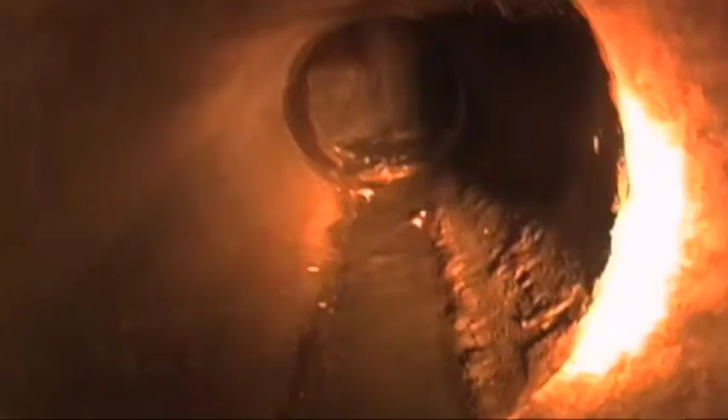So wastewater originates from predominantly industrial, commercial and domestic sources, and in the majority of cases this effluent's released back in the environment after receiving lengthy processing and management to minimise its impact on the health and safety of the environment and the public. However, with the development of new technologies, newer emerging pollutants are being detected and researched.

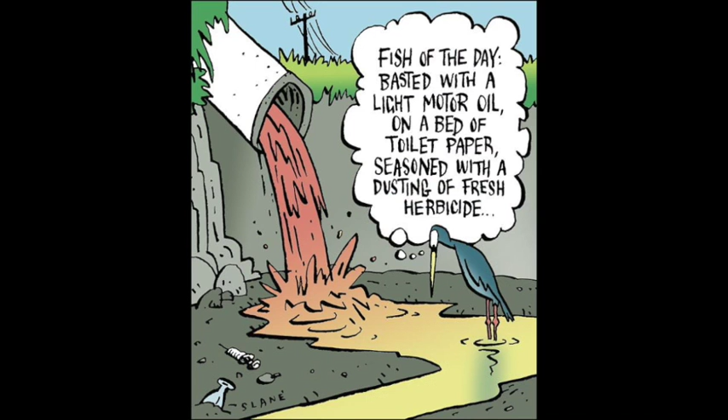These can be originating from a new source, using a different or newly exposed pathway to the environment, a waste or byproduct from a new treatment process, or a new detection method has highlighted their existence. Currently, the baseline data, including occurrence and concentrations of management policies and processes to deal with most of these emerging pollutants, do not exist, and their ultimate fate is largely unknown.

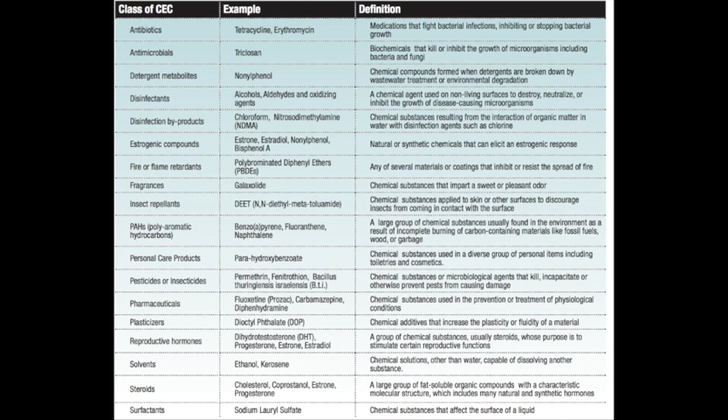A study conducted of marine water from 30 sites adjacent to stormwater outlets across the entire Sydney estuary, the first of such in Australia, had alarming results. The presence of recognised domestic waste markers and pharmaceuticals in all parts of the estuary, especially after a long dry period, indicated that sewage is leaking into stormwater systems or domestic wastewater is being illegally connected into stormwater piping.

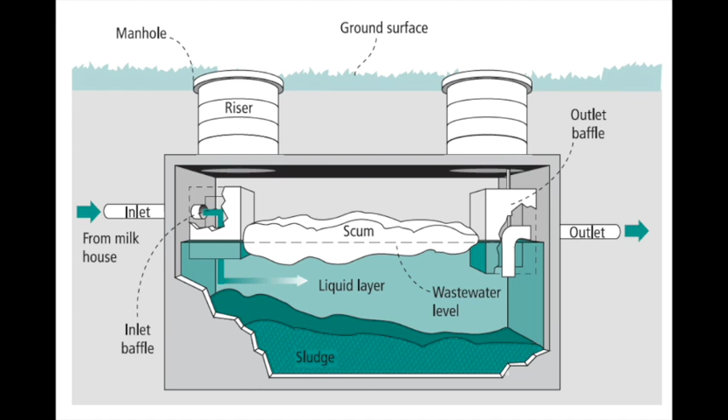Regardless of the stringent treatment protocols for the processing and fate of our wastewater, all pollutants will never be completely removed from reaching our environment if this is the case. Aerobic and anaerobic water treatment. Aerobic is done especially when COD is below 2000 milligram per liter and when the production of effluent quality is 120 milligram per liter and 20 milligram per liter of BOD.

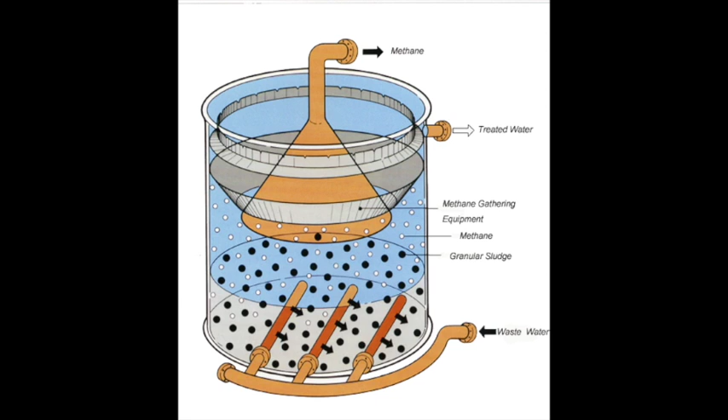It is technologically very good as it improves oxygen supply in the water, decrease of sludge, work within the integrity of control system. The anaerobic is the opposite, when the COD is above 2000 milligram per liter and BOD is above 1000 milligram per liter. This option is more sustainable and in the long run more economical. There are good options for this anaerobic system. It produces biogas, low sludge production, no odor release, small footprint, and more energy production instead of energy consumption.

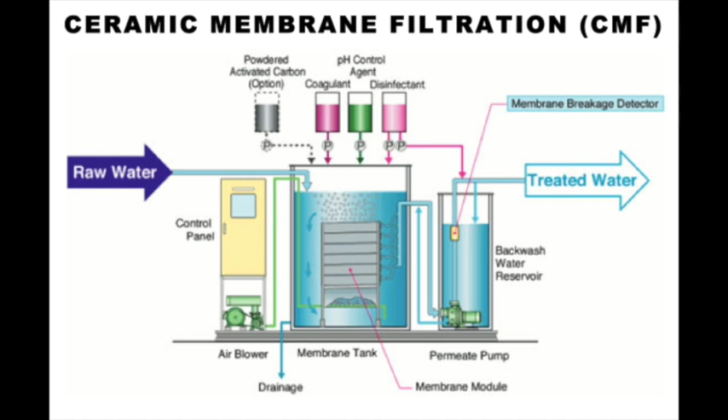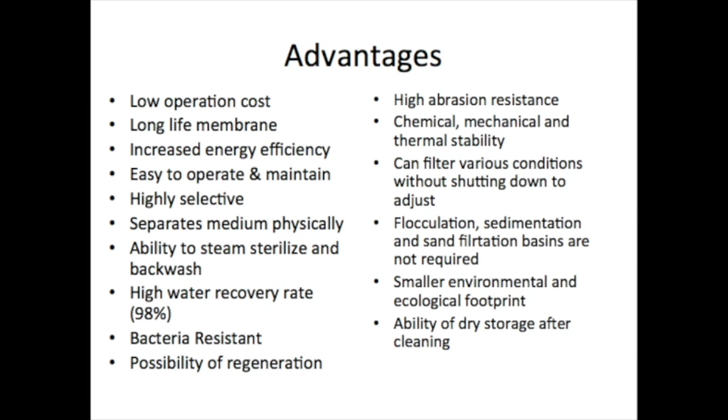A membrane is a thin, porous sheet that separates impurities from water. A ceramic membrane filtration system uses a unique ceramic membrane to remove micropollutants, turbidity, harmful bacteria, and protozoa that may impart the taste, colour, or odour of water. Advantages of the ceramic membrane filtration system include low operation cost, high water recovery rate, and chemical, mechanical, and thermal stability. The ceramic membrane filter is an asymmetric bundle of ceramic membrane channels housed together in a high-density membrane packing.

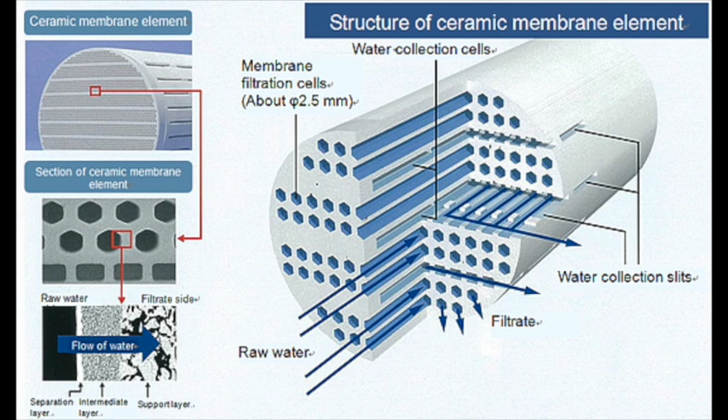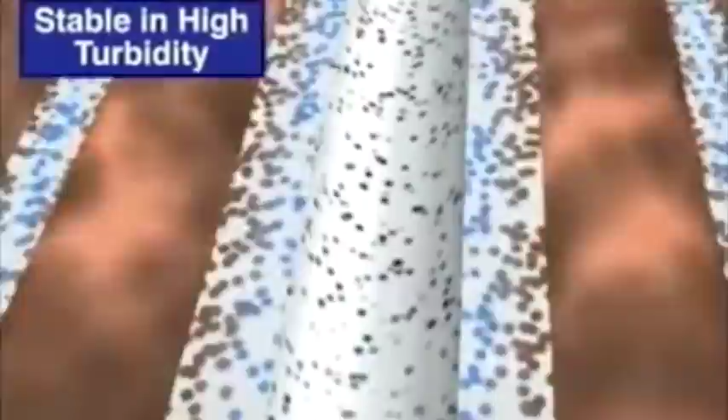Different pore sizes can be used in the process to cover a size range of 5 microns down to 1000 Daltons. The ceramic nature of the membrane allows it to handle extremes in temperature, acidity, and pressure without concern. The ceramic membrane filter uses a cross-flow filtration system. The osmotic pressure difference either side of the membrane causes filtrate to be drawn out through the membrane. The filtrate separates from the medium and passes through the membrane, while rejected particles are swept away through the feed flow.

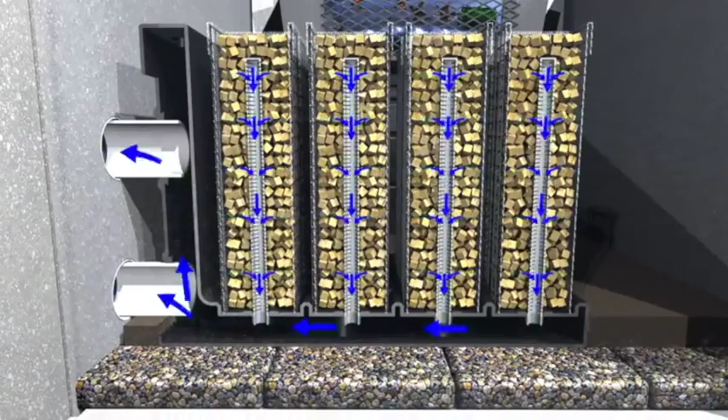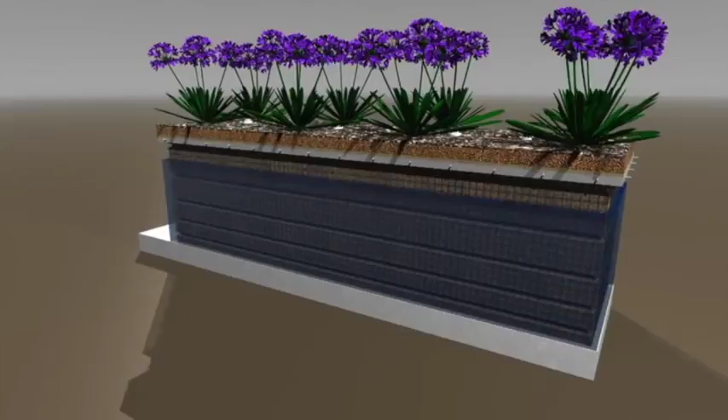Constructed wetlands are designed to take advantage of natural forces to purify wastewater. These include photolysis, plant uptake, degradation, and soil adsorption. Horizontal subsurface flow constructed wetlands contain an impermeable layer at the base with porous filtration media at the inlet and outlet and a soil bed in between with planted vegetation. The simple system has many benefits.

Surrounding the plant roots and rhizomes, a network of anoxic, aerobic, and anaerobic conditions exist. Some conditions are more effective at removing certain pollutants. For example, within pharmaceuticals, anoxic removes halogens, anaerobic removes diclofenac acid, and aerobic removes ibuprofen. Comparing the ESD between conventional wastewater treatments and constructed wetlands using a triple bottom line approach.

Environmentally, constructed wetlands are proven to be much more effective and efficient at removing CECs. They also generate new diverse ecosystems and they also use very low energy and chemical consumption. Economically, initial costs are similar between the two. However, maintenance and operations costs are much lower for wetlands. Socially, they are much more aesthetically pleasing to the eye and improve public safety.

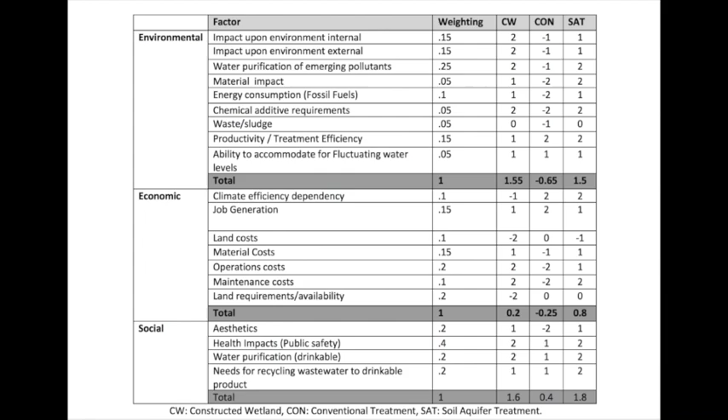In conclusion, further exploration and research should be done into the implementation on a widespread scale, especially in regards to removing contaminants of emerging concern.